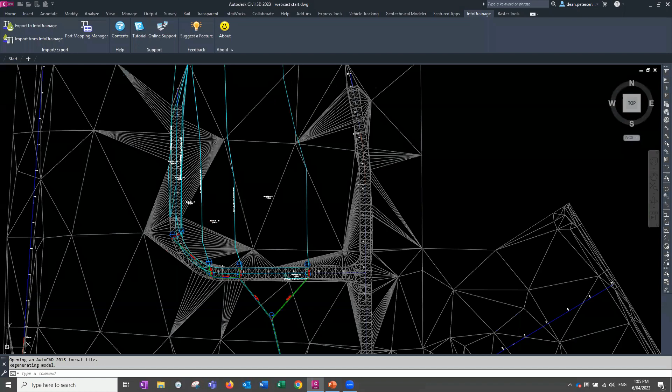So I'm going to open up Civil 3D here to begin with. Now, for anybody that has seen any of my webcasts up on YouTube before, and that's where this will end up eventually, you may recognize this little model, and if you've done training with me, you'll probably recognize it as well. Just a little Civil 3D model of a pipe network.

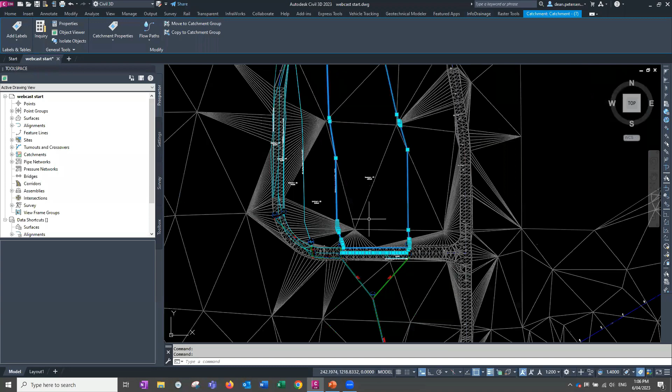The one thing that might be a bit different if you haven't used them before are these catchment areas. These are in Civil 3D already. Make sure you are using the catchment areas that are the new type. Under the Analyze tab up here in the ribbon, there are these ones, which is Create Catchment from Surface. Not the old type, which was to pick a surface and use this catchment area out of the ribbon. Don't use those. These are much better. They recognize when there's another catchment area next door and they don't overlap.

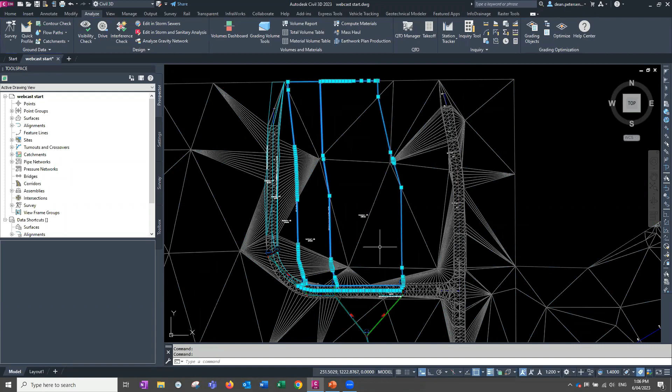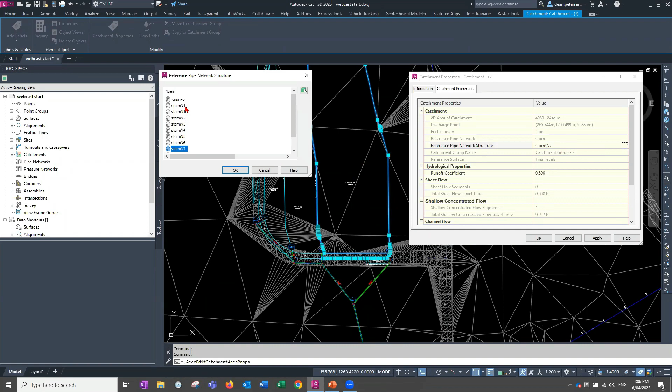Also, if I have a look at the catchment properties of one of these, when you create them, you've got the ability to give them a reference pipe network structure. So all the water from this catchment is going to go into what structure? It's going to go into storm N7, and we can nominate or pick a pit for them to go into, or a sump, and that's the N7 there.

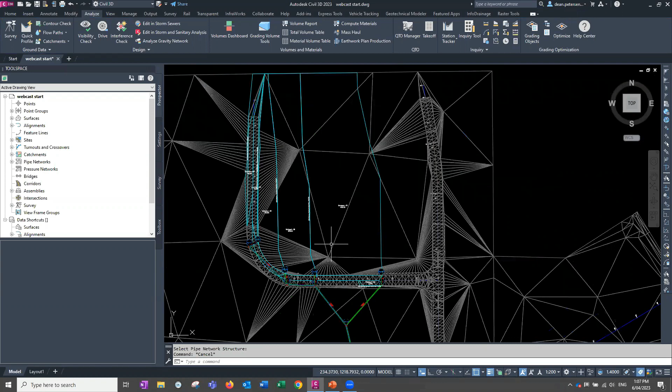Yep, that's it. And so that information will transfer across, as you'll see. So use the new ones out of the Analyze tab in the ribbon. Okay, let's have a look at the export function. So

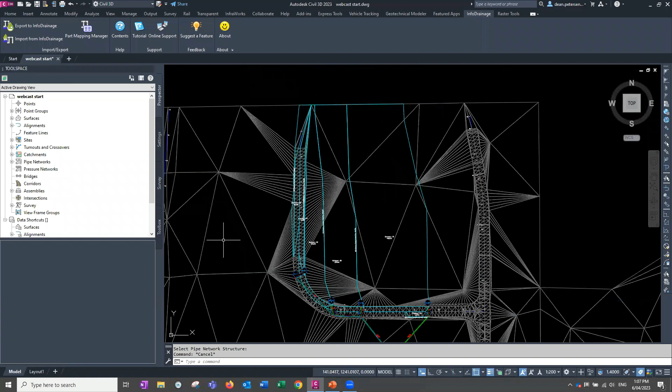MicroDrainage or InfoDrainage. I said micro because, as I understand it anyway, this is the next iteration, if you like, of what was called MicroDrainage, now these Innovyze products. So when you load InfoDrainage onto your machine, it will put a ribbon into Civil 3D for you, which is the one we're seeing right now.

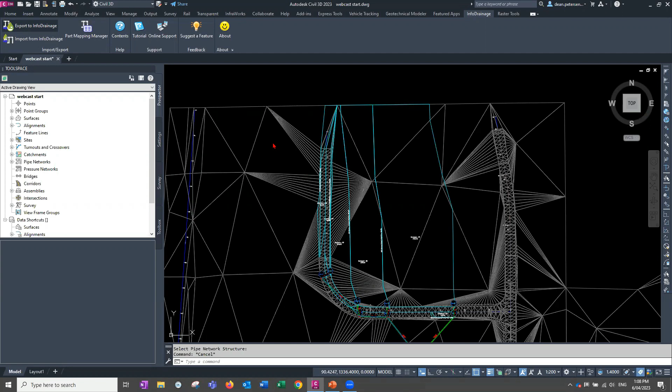And we've got this button here, export to InfoDrainage. So I'm going to click on that. It might take a moment to come up. It's got to go and find its license and things like that, I believe. Here it comes. And we want to tell it where we're going to write this out to. So I'm going to go to my desktop, put it there, just call it web for the web training. Going to go next.

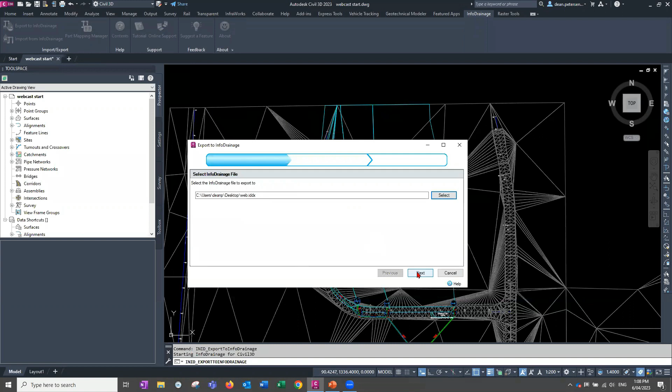It'll look at all the networks in your drawing. This is the one I want to export. And I'd also like to export my surface. The surface in here is called final levels. So I'm going to export my final levels surface out to InfoDrainage as well. Go next.

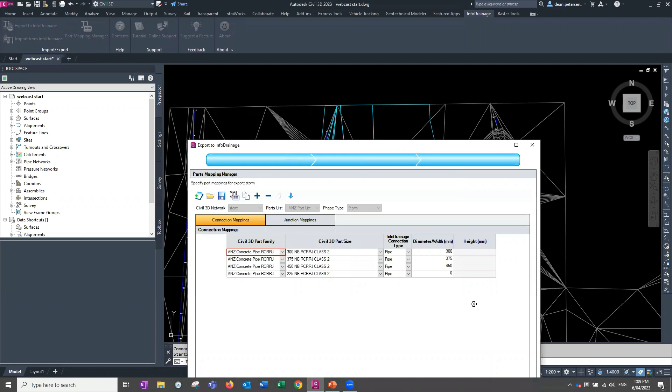Okay, once you get that nominated, it then goes through and asks you what these pipes that it's found in your network want to correlate to once they get over into InfoDrainage. So these pipe sizes here, if it's found my 300 pipes, it's going to make them 300 millimeter internal diameter when it gets through to InfoDrainage, Innovyze, and you can change those if they're not matching up properly.

Now my 225 pipe there hasn't put the right diameter there. Also 225 is what it's going to be to make a 225 pipe in Innovyze. Okay, so that's the pipe mapping.

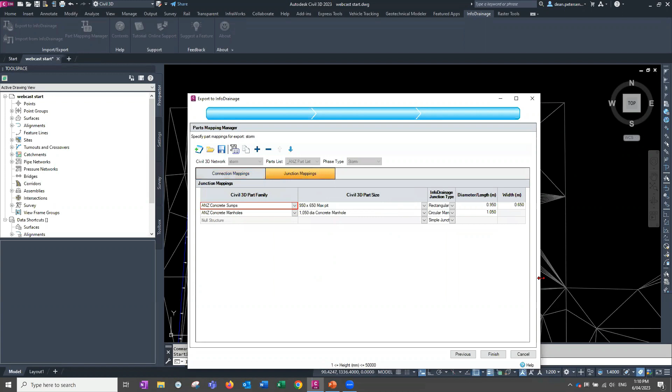We'll look at the junction mapping now that goes across, and I actually like the fact that it's asking you what you want to do, and you can change it manually rather than trying to do it automatically in the background, which some of you might have seen for things like SSA if you've tried those before. I actually think this is quite good. So we'll see that when we come back again as well.

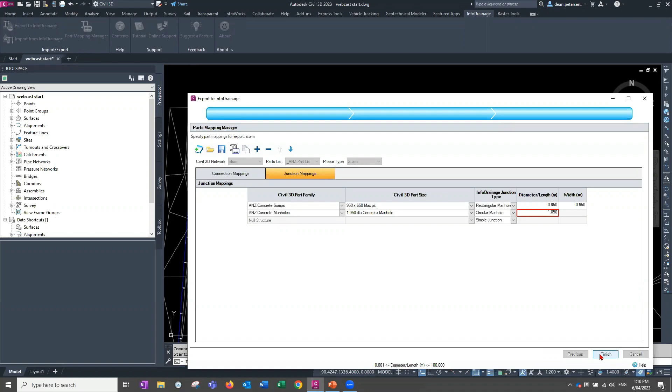All right, so yep, my 950 by 650 max pit's going to be 950 by 650, and the manhole's going to be 1050 diameter when they go across. So that's all good. Go finish. And it will export those, and she's all done. All right, I'm going to leave this open. Just make it a bit smaller.

And I'm going to open up the IDDX file, I believe is the right one, to go and open it. And again, it's going to take a moment to get its license and things. I've clicked it properly. There it goes.

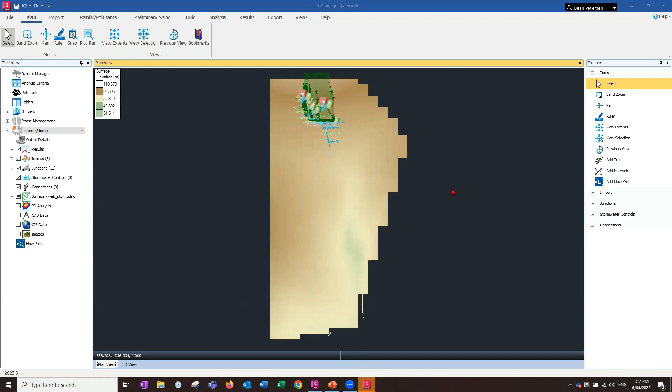So I believe this product was actually made in the UK, moving on from MicroDrainage. So it's not really American based like Civil 3D is. So that's quite nice. Okay, so here we go. So this is InfoDrainage, the one that works with Civil 3D. The other ones don't do a direct conversion across from Civil 3D like we've just seen. They may in the future, but at the moment they're not.

So we've got a surface here. It's displayed differently from what we see in Civil 3D, but if you don't like to see it, you can turn it on and off. Where is it? Here it is. So we've just got the tree view down the side here, which you might be used to from many other programs, and you can just choose to turn things on and off. I probably don't want those contours, get rid of those.

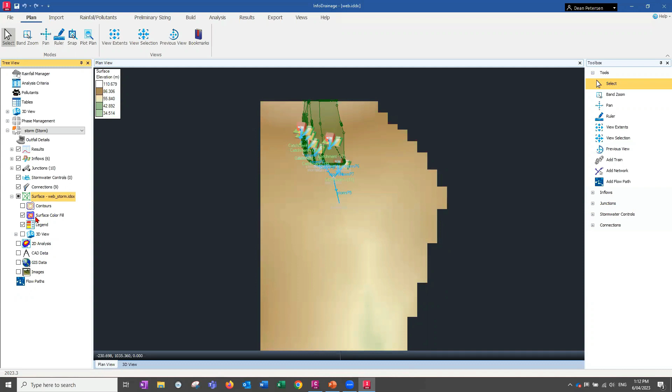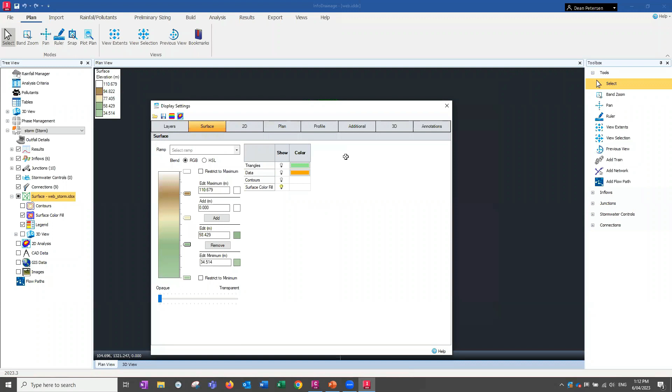And if I want to, I can actually go into the display settings for that surface and change the way the coloration's done. So I'm going to move that up, move that up, move that up, and it's just giving me a better color graduation there if that's what I want to do. That's nice and easy. What I can also do is, oops, where'd that go? Close that.

Change the display settings for the size of these icons. So display settings, in plan, text height, I'm going to bump that down to about 5, I think. And the icon height to about 10, something like that.

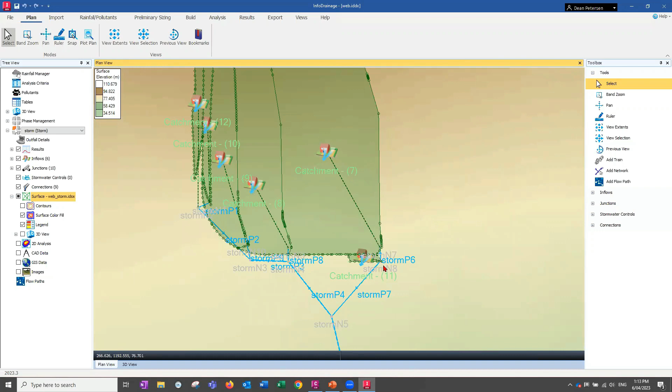Just to make things a little bit easier to see what I'm doing in a model this size. So you can see my catchments have come through. They are linked to those structures that was done in Civil 3D, so that's nice. All the pipes are here. I can click on one of those, and all the pipe sizes and things and their levels will come through as you'd expect them to.

The catchments themselves, double click on those, and you can go through and change all your catchment properties. The dynamic sizing, there is a pipe sizing function up here in the ribbon somewhere. Preliminary sizing. I believe that's the top one here, preliminary sizing. Yep, that makes sense. Which is a quick analysis and just a quick pipe sizing for you. If you haven't done it already. Most of the time you're going to know what pipes you just want to check, in which case the full analysis is this bottom one.

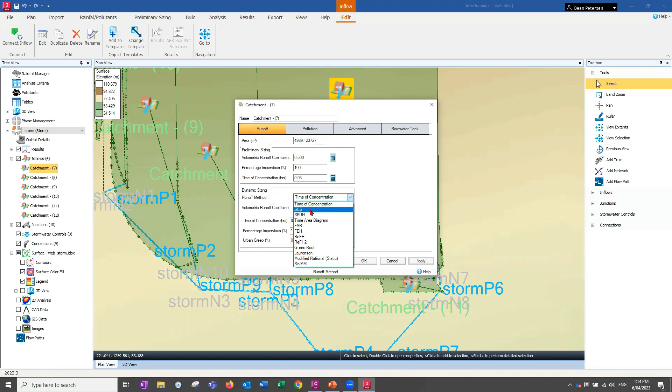The runoff method is a simple time of concentration here at the moment, but you've got many other options. Modified rational, SWMM, what's the other ones I've seen used? SCS I've seen people use here. And each one of those will give you different parameters that you fill out for your particular catchment area. I'm just going to leave that on time of concentration here at the moment. I'm not going to change any of those limits for time, but of course you can.

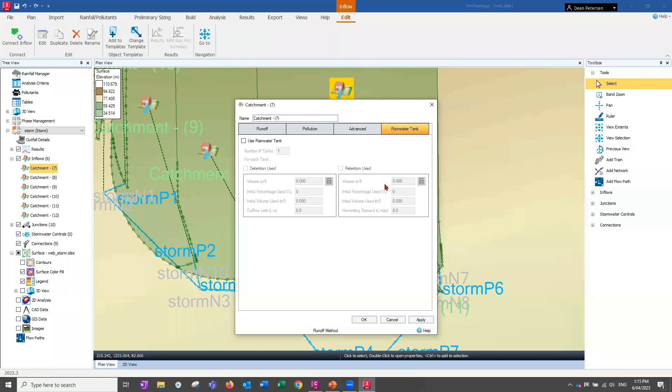And then you've actually got pollution buildup that can be monitored as well. Put in path lengths and things, and it looks like each one can have a storage tank as well on them. So I'm okay with that. I'll cancel that out of there. Speaking of that, there are other objects. So for instance, if I zoom in down here,

we can, under build here, add other stormwater controls, such as a bioretention pond, all sorts of other ones, actual ponds, infiltration trench, a swale, and all of these have the ability for water to be lost out of the system by infiltration. And the cellular storage, underground storage, tanks and pipes as well. So if I just show you one of these quickly, you just sketch the size you want it to be represented as.

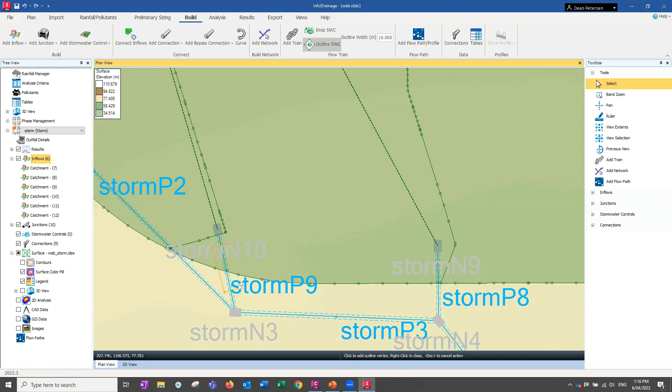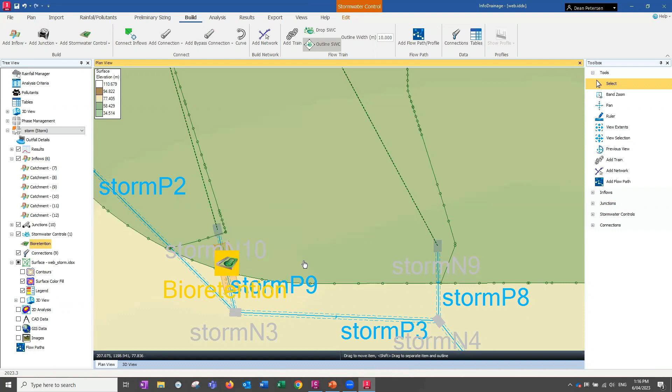Oops, sorry. And that's just what it's going to show up on the plan view. There we go. And it's a little bioretention pond, and it's got all its own properties and things that you can define. It's picked up those dimensions, but you can obviously override those with filtration layers. There's actually an image down the bottom here that shows you what all these things are that you're typing in, which is actually quite useful.

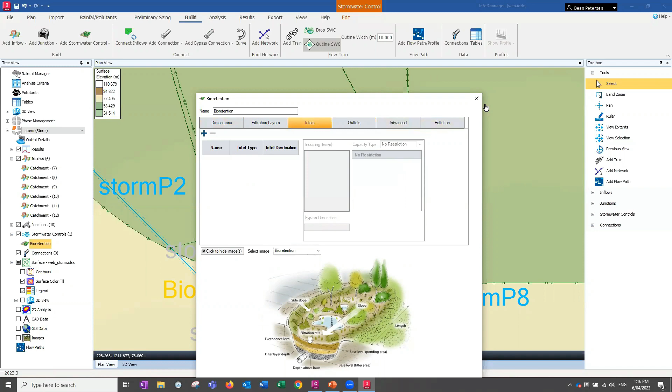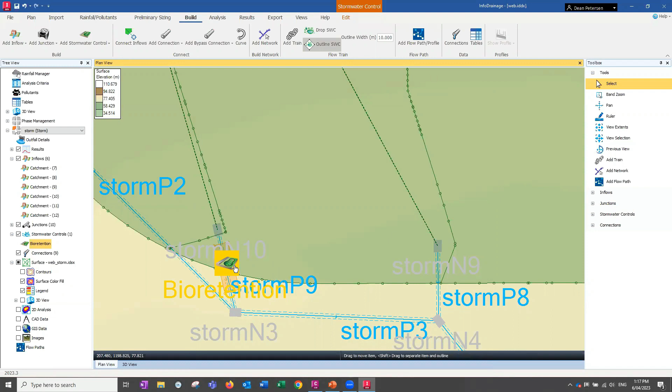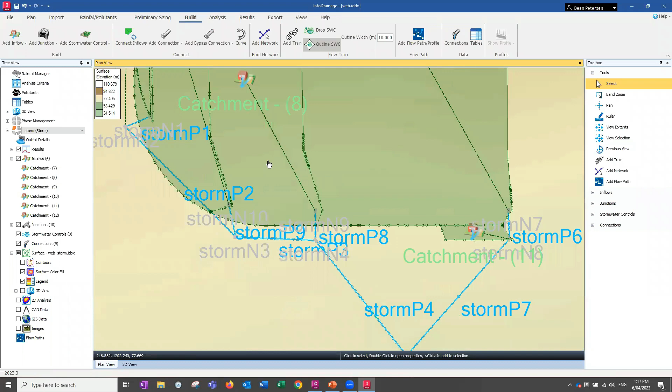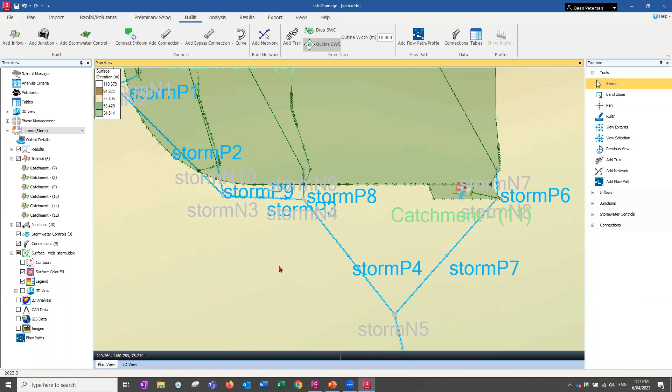Inlets, outlets, and you can simply take your pipes and connect them through that bioretention structure, and that will be analyzed at the same time as all your pipes. Not going to do that. I'm going to keep it the same as Civil 3D for now, but all of that functionality is in here, which is good. That's what we're going to be doing or needing very soon, if you're not doing it already. So that's a big part of what these programs do, is have that extra functionality. Okay.

We need to go and have a look now at the rainfall manager here. So the input of the storms that you can apply. So I've got the rainfall manager. For those in Australia, you'll be pleased to know the AR&R, Australian Rainfall and Runoff, I believe it means, is already in here. For New Zealanders, unfortunately, we're going to have to use a user-defined rainfall to get our data, or there is IDF curves down here if you want to define those. However, let me show you this AR&R, because I think most people on this call are actually from Australia.

If I add one of those, it gives you the wee map, and you can go and get the data for any part of Australia that you want. And so I'm going to go down to Melbourne down here and say my project is there, shall we say, out by the airport.

And you can click the download button at the bottom and it'll go get all the data that you want. Now, just to save time, I've done that already and downloaded it. It's just a few files that it needs to go and grab for that particular part of Australia, which is nice. So I'm actually just going to load them up down here manually. And if you have your own files already, you can just load them up the same way.

So it's the hub data text file, the BOM design rainfall, and the BOM coefficients is there. Okay, I did actually get those ones just from this map from the public data. So that being done, we need to probably have a look at the other tabs up the top here. Well, we do actually.

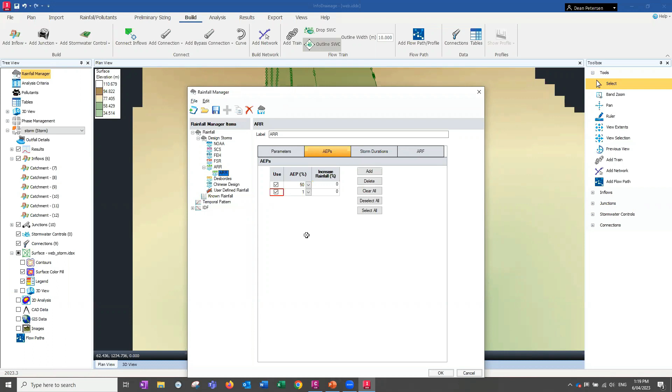So what's the expected rainfall frequency? So that's our AEPs. I'll put another line in there by clicking on the add. So for this analysis, we'll just do a few. Let's look at the 2-year return period, which is the 50% chance of occurring, and the 100-year, 1% chance of occurring. We'll do both of those. Obviously, you can do as many as you want. It'll just take longer to calculate.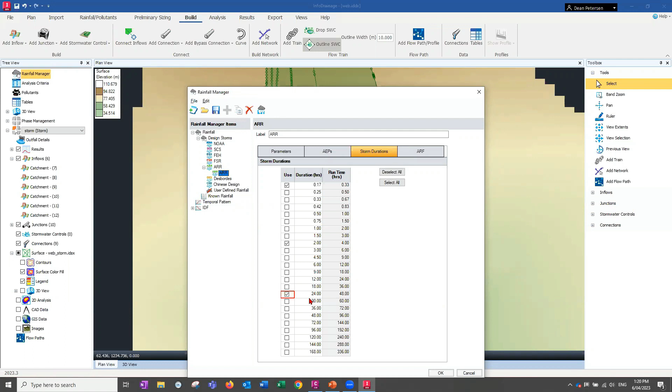Storm durations that we want, you can select as many as you want. For this one, let's do a quick cloud burst, 0.17 of an hour. Let's do a 2-hour storm. Let's do a 24-hour as well. I guess maybe a 3-hour as well. What the hell? That'll do for now, but obviously you choose the ones you want.

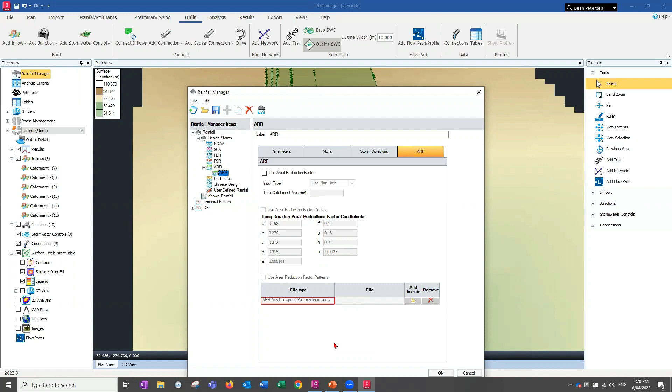Then there is an areal reduction factor as well. I haven't actually got a file for one of those, so we'll just leave that off for the moment, but that's all there. All right, so that's nice for you guys in Australia. So I'm going to go okay, and have a look at the analysis criteria now.

Once we're in here, we're going to do the full dynamic analysis rather than the quick static. We'll tick on those rainfall events that we wanted. So it's actually going to calculate 80 different storms. And here's the output interval for the results. Every 5 minutes, it'll do a result. So I'm happy with that.

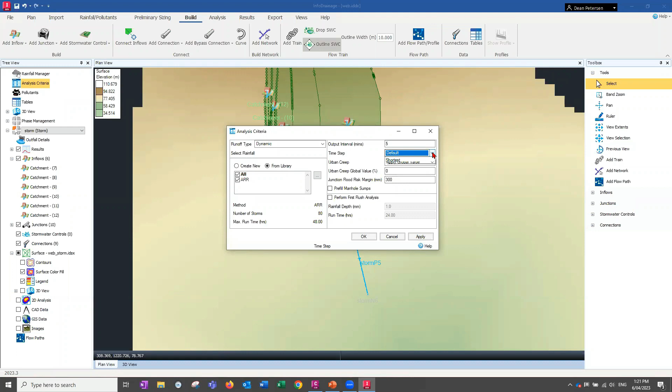Time step, you've got a couple of options for time step for the analysis. Now, I believe it's the SWMM method of analysis the whole program is based on. But the default seems to work pretty well. It seems to be very, very stable. So that's quite nice. Urban creep. So that's if you're expecting the amount of impervious areas to increase over time. I believe that's what that's for, which is this figure here.

And the junction flood risk, I believe that's 300 millimeters below the lid of a pit. It will assume that means you need to be worried about overtopping at that point, and it will flag it. And it can do a first flush analysis, but I'm not going to do that. That's all I need. So we'll go okay.

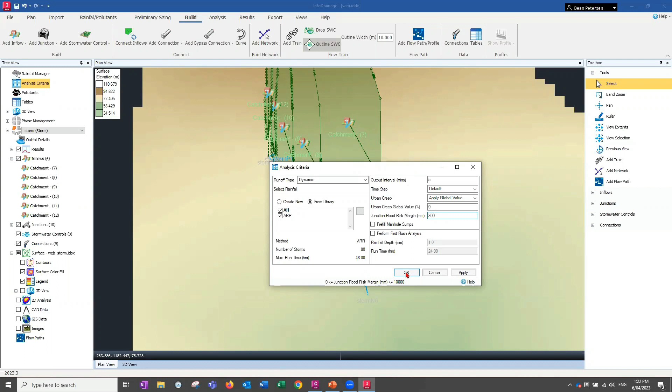Now you guys, as I say, being the AR&R method, you'll have a better idea of what you're actually wanting to input, because as I say, I'm no hydrologist and I haven't actually ever used the AR&R method, but hopefully what I've shown you there makes sense. I've been making that one up as best as I can. I think that's how you'd use it. I assume that's right. Let me know if it's not.

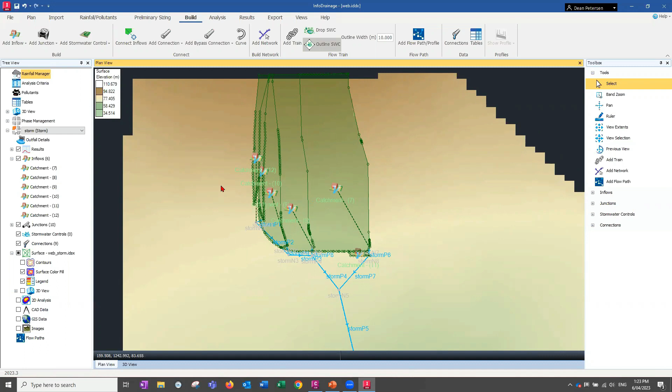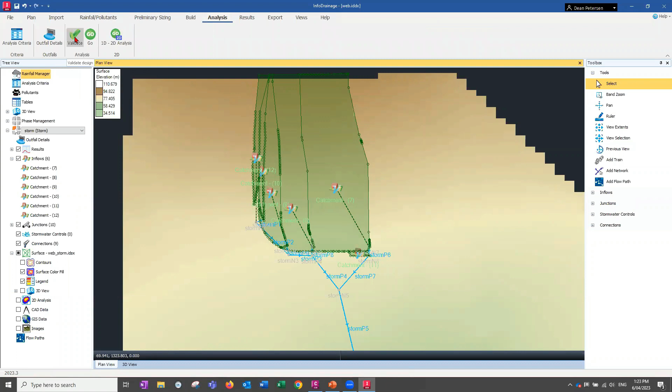The thing we want to do now is probably check that everything I've set up is good for analysis. So let's go to the analysis tab up in the ribbon. There's a validate here, little tick mark, click on that. It'll have a look at the model, and we do have some issues.

Okay, so these first ones here, it says match invert elevation to the lowest connection invert elevation. So it's slightly mismatched between the data that's read from Civil 3D, the bottom of the structures, and the lowest pipe. And it's only a few millimeters, like 4 millimeters, 3 millimeters different. So I'm happy with all those. I'm going to tick those on, and the software will fix those up so it can run the analysis.

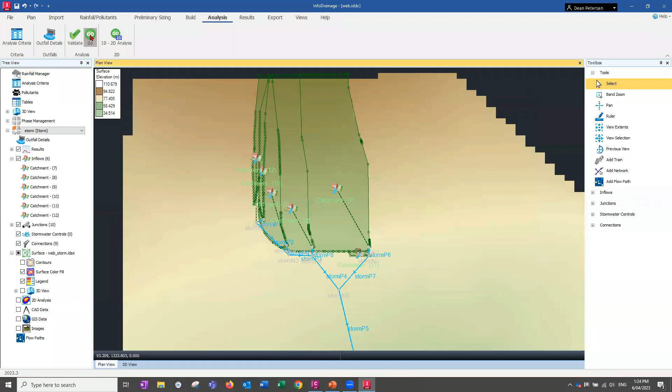This one here, match connection elevation to the upstream invert elevation. Again, a couple of millimeters. That's not going to make any difference to my model. It's below survey accuracy anyway. So we'll fix all those. We'll go okay. And we'll go validate again, and it's all good, ready to go. So I'm happy. I can run my analysis. I'm going to click on the go. And it shouldn't take too long.

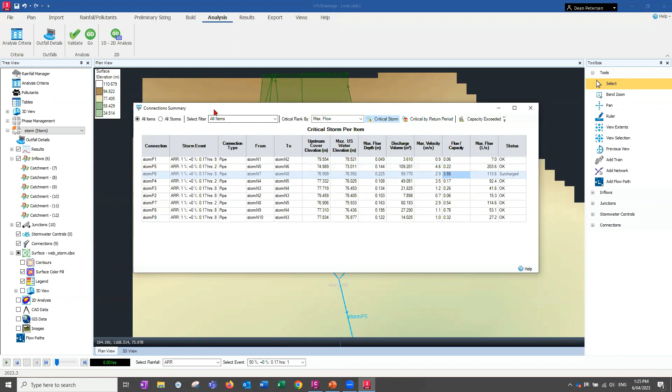And here's one that's surcharged. Okay, these are the things you're looking for. And the flow over its capacity is 3.5. So it's well flooded or surcharged. So we probably need to see where that is. It's Storm P6. Now, so far, I don't think I've actually found it, or capacity exceeded here. Yeah, there we go. And it highlights it in red when you click that button.

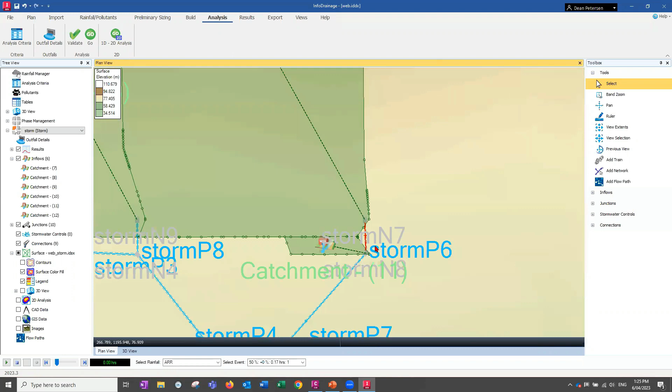I don't think I've actually seen if you can double click on this and actually zoom. I'm pretty sure you can't zoom to that pipe, but it does highlight it as red in the plan view. So here it is. I can go and have a look at that, but I can also get a long section through this, which is quite nice.

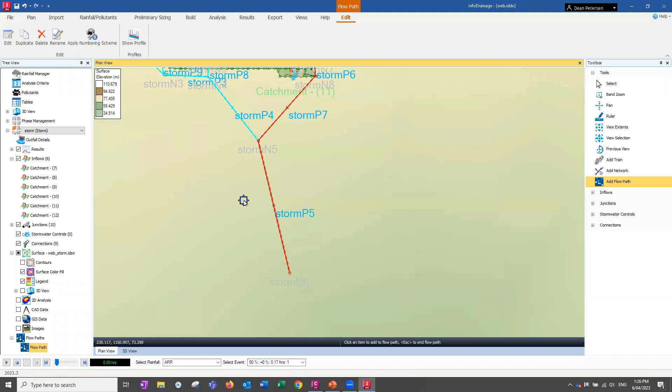So if I go and add a flow path from there to there, this had a wing wall on the bottom of it in Civil 3D. It's actually converted that to an outlet already. It just figured out that was the lowest pipe, it must be an outlet. So let's do that as a flow path. I can rename that if I want to, but I can also get a profile from it.

So there's my profile. These are customizable in the display settings here to change how they look, but they're actually not bad. There's a couple of buttons up the top here. There's the minimum cover depth line. You can set that depth somewhere, I think it's in those settings, but I'm going to turn that off just to make it easier to see. Sorry, that's the HGL. There's the minimum cover. That one there can go off. I want the HGL on. And if we zoom in on this, we can have a look at that Storm P6, the problem pipe.

And there's a play button down the bottom, we can actually get a graphic. It goes really fast actually for a storm this quick. So you can actually just use the scroll to come through, and there you can see that is full at that point and going back down again. Now, the critical storm, I think it was number 7 was the one for that pipe. So it is backing up in there in the pit, but it's not actually overtopping.

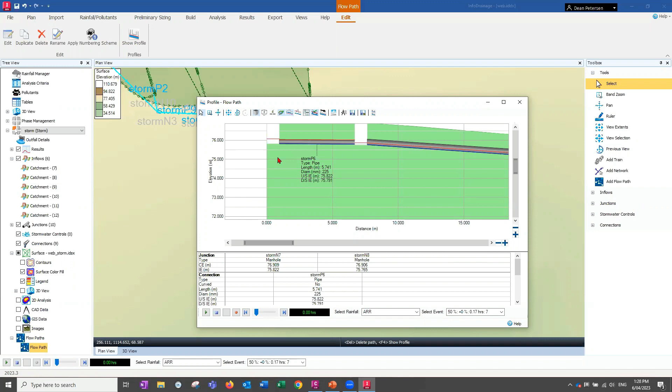So that's okay. But the pipe is surcharged. It'll be getting close, I guess, to starting to overtop. So we probably want to do something about it. We want to bump it up in size, I would think. So I'm going to come into here, and we want to show this round trip anyway. Pick on that, double click on it, and instead of a 225, let's make it something that's got plenty of capacity. Let's make it a 375. So we'll see that change happen.

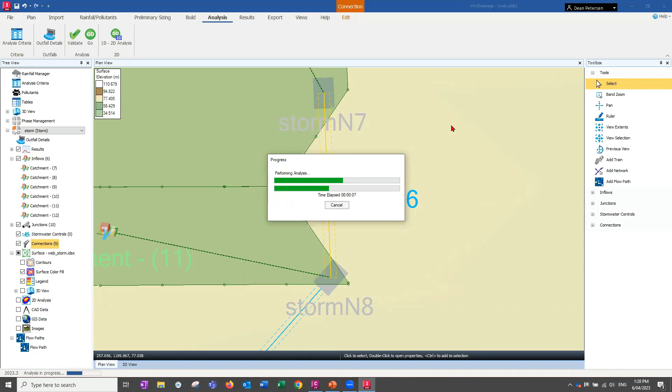Make it a 375, go okay, rerun my analysis, and it should be all good. Being a 375 is massively huge. Go. Okay, and again, look at the critical storm. Actually 0.92, so it's still getting up there, but it's not surcharged anymore. So that's good. I did go big enough, and yes, Storm 7 was the critical one, as shown over here. All those are different storm events; for each pipe it'll be a different storm that's the critical one.

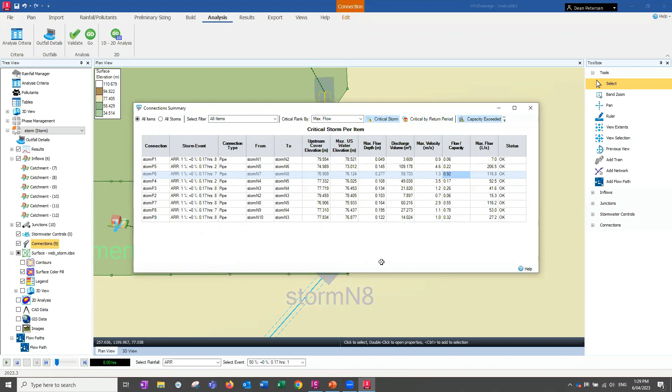So that being said, let's go and take this back to Civil 3D. So I'm going to save, and we'll see that change come back in theory, hopefully, if I keep my fingers crossed, because that actually had a problem. Now if I go to the file, no, not the file tab, plan, no. Here we go, about. This version that I'm using of InfoDrainage is 2023.3. 2023.2 and previous, when you take it back to Civil 3D, was crashing, at least mine anyway.

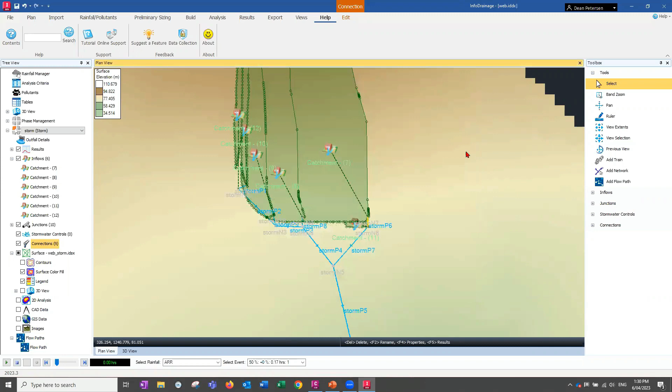This version is the one you want, because the ANZ parts list seemed to be the problem. They fixed it for the UK and Ireland parts list to work. They were getting a similar crashing issue, and it's fixed ours as well. So if you're using this, or if you're going to, make sure you're at least using 2023.3 version or later. Okay, let's just save, we've done that. Let's go back to Civil.

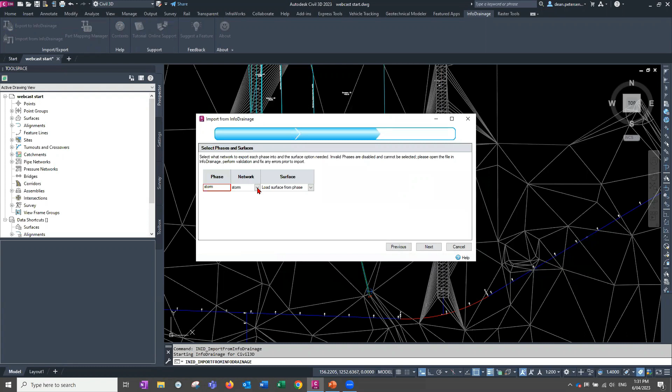And let's bring it back. So from the InfoDrainage tab in the ribbon, import from InfoDrainage. The file to import will be the one on my desktop that we've just been playing with. Go next. The phase we're analyzing is called storm. The network we want to bring in is called storm in Civil 3D as well. That's what I called it.

And for the surface, we're going to tell it not to change the surface. We're going to just keep this one in our drawing, so use the existing Civil 3D surface. It'll then find all the pipes in the InfoDrainage, and it asks what do you want to convert them to when they come back. So they're all going to be RCRRJs for me.

And we've got a 300. And this is where you get to choose the one you want. It doesn't try and do it automatically, which means it doesn't stuff it up. So I quite like this system. It doesn't take long to do. 300 on the board, 450. So it doesn't grab the wrong one, the one you didn't expect it to, which has been a problem with other exports to analysis before.

450 and a 375 class 3. And class 3 because it's under the road. So 375, 450 and 300. Cool. And also the junctions. So that rectangular one was the sumps or pits, and it's a 950 by 650 pit. And the manholes, circular manhole, is our 1050 diameter concrete manhole.

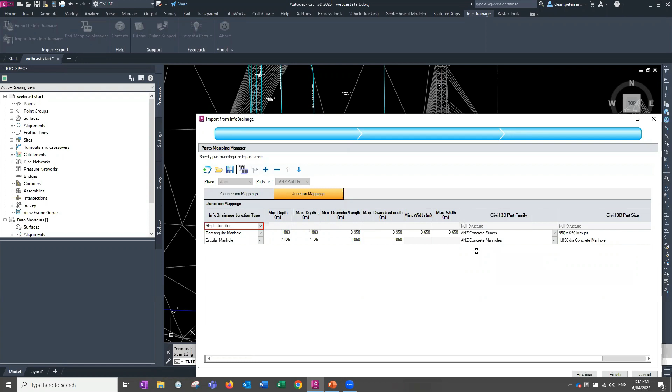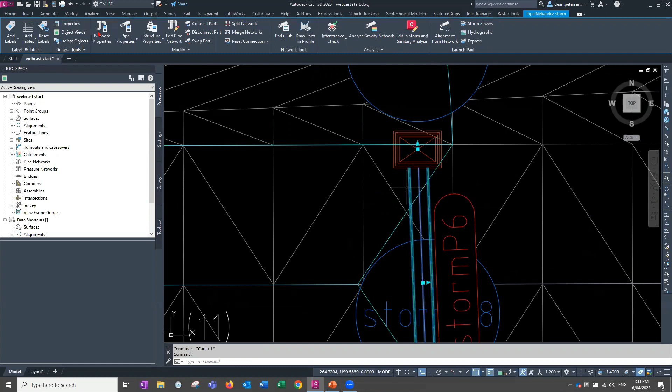All right, down the bottom, I'm going to go finish. It's going to import those. And once it's finished, there is our, used to be a 225. Now it's a 375. You can see the size is 0.381 there, but if I go and have a look at its properties, we will see that it is 375 class 3, exactly what I told it to be.

All right, the only thing I can see bringing it back, if you have some that are RCRRJ, other ones that might be a 375, PVC pipe or something like that, maybe. You'd need to identify those somehow so that they're slightly different. So I'd actually make one a 375 in InfoDrainage, and the other one maybe a 376 or a 374, and just note that if it says a 374 diameter, that's what I was using for my plastic pipes, and then you'd have those in the list to make as separate pipes when they come back. So it would probably be able to get around mixed networks that way.

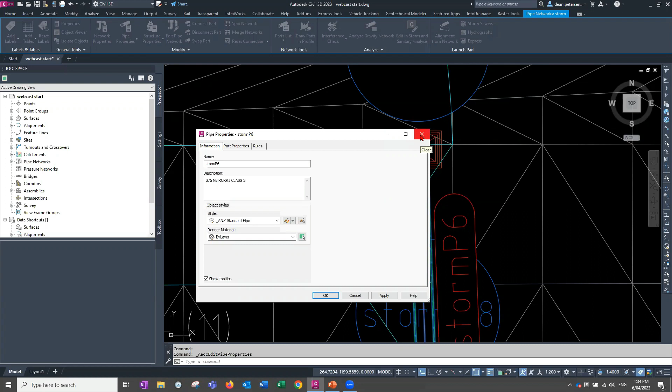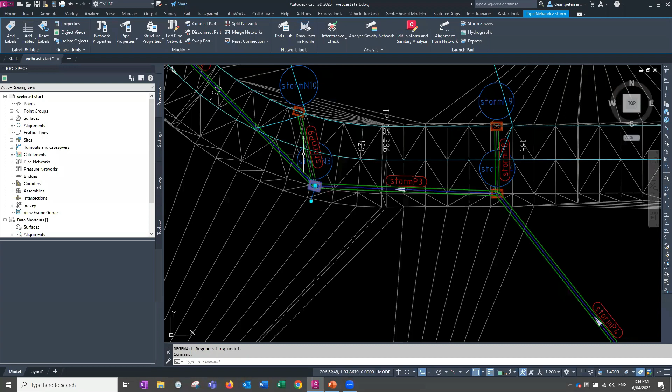Okay, so that's come through, and we should be all good. And if you have a close look at this, it hasn't actually affected anything else that it shouldn't have. All the pits here are the same orientation that they were before. And the manhole as well, you can see it's skewed off to the side. The only thing that it has done is we don't have the wing wall on the end anymore, in which case you just need to go and find over in the side here, it's actually got a null structure there. Just select the null structure and convert it back to a wing wall.

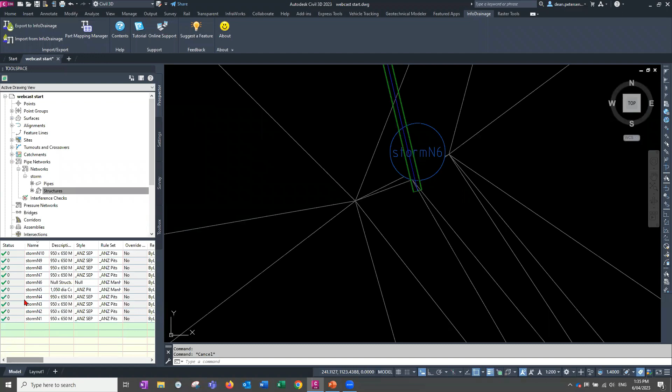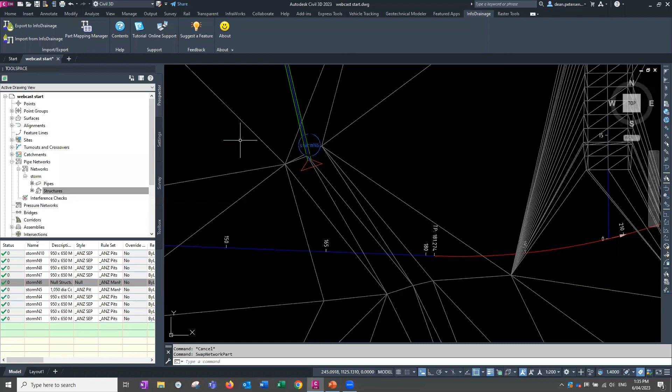Actually, we'll do it just quick as we've got a little bit of time. You'll find that the orientation is still all there as it was previously. So the null structure is there. Go and select it. Right click. Swap part back to the wing wall that it was. So that's the only thing I've seen that gets changed so far anyway. Put one of those on it. Okay, and there it is. And it's at the right orientation that it was before it left. So that being said, that is InfoDrainage.

Now what I want to look at next is the next step. So this is relatively easy. This, as far as I can tell, is a cut down version of the full ICM. So let's go and have a look at what the full ICM is. This is what I would get into big trouble with, not being a proper hydrologist. As you may well know, hydrology is something of a black art. We need the practitioners of that black art to be the ones that use this. It's massive. It's absolutely huge, what it can do. We're going to have a look at, in particular, 1D and 2D flood analysis. So there is, I believe, back in InfoDrainage, the ability to do a 2D flood analysis, but we've got it even more capable in here.

So if we actually bring up one of these. Here is a model that somebody spent a lot of time building. So that's why I haven't gone and done this myself. Somebody's gone crazy bananas on this one. But it gives a good idea of what you can do if you know what you're doing.

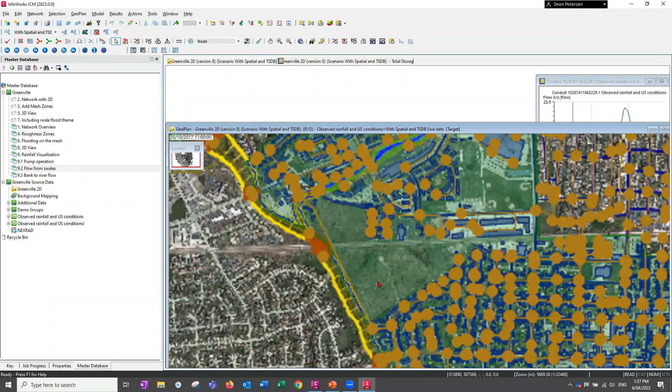We have a big 1D analysis, which is all our pipes and our structures. We also have in here, if I can pick it, the 2D zone. That area has a surface on it. Now, you might have seen these 2D analyses were talked about before. What they are, or why it's called 2D, always confused me.

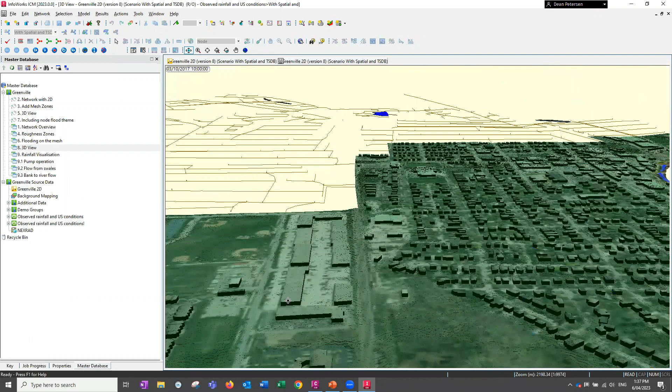So if we go and have a look at one of these, 3D view, and bang it into 3D, so we've got a 3D view here, and you can go under the ground and see all the structures underground if you want. Somebody spent the time to actually lift up those as buildings and put impervious roofs on those and discharge that into the pipe system. Everything else is done as runoff, but the runoff, if I can just zoom in carefully.

Okay, here we go. Here is why it's called a 2D analysis. We've got the triangulation that came from the surface, but they aren't sloped triangles. They are flat. So they are two-dimensional faces. But that's how it works out the flow from one to the next lowest one next to it, to find all the ones around it and find the lowest one next to that. And that's how it routes the flow. So that's why it's called a 2D analysis, I believe, as far as I can tell. That's my understanding.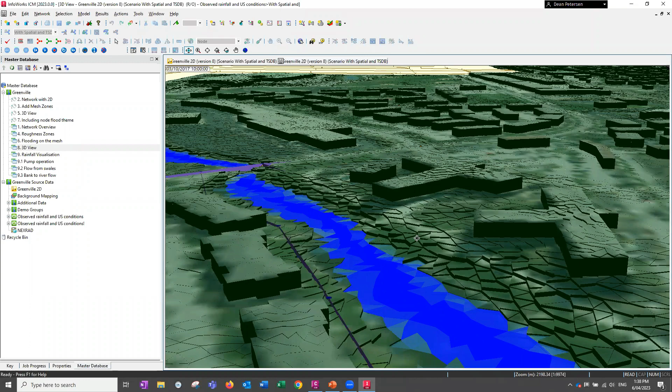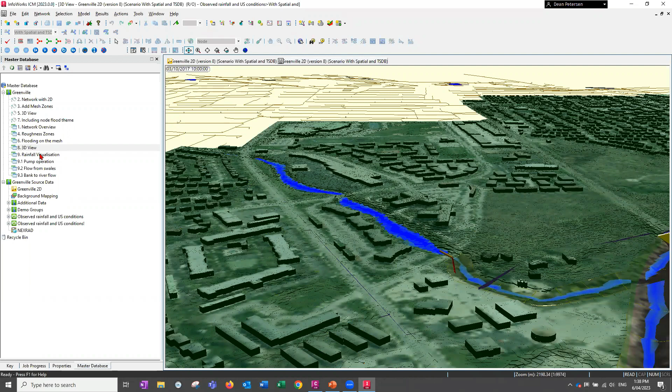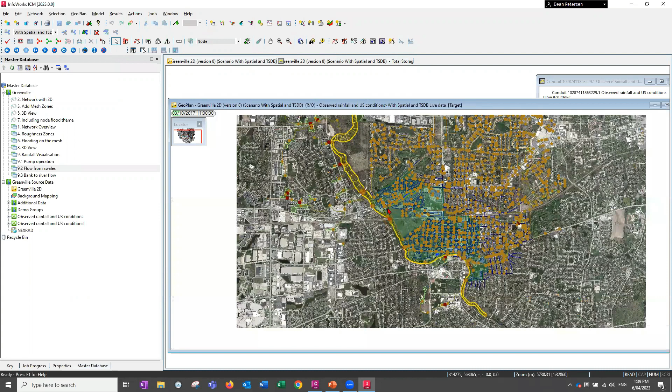But let's have a look what you can do with this. I'll bring this one back up again. Flow from swales. This particular model has been set up with a rainfall event to try and figure out what happened in this particular town, and I'm not sure quite where this town is. It's a data set I got from Autodesk, but it might be in the UK. What happened with a particular storm that caused a lot of flooding. So they've modeled everything, or they had everything modeled perhaps already, and they can run the same storm event across it.

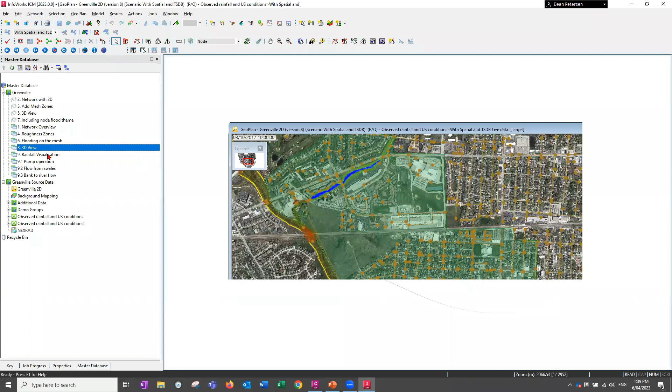In fact, if we go and have a look at it, no, not 3D view, rainfall visual. They've actually programmed in, here we go, the rainfall event. There's a play button up the top here. So from, I believe, the rain radar on that particular day, they have got the intensities that occurred. So there was a storm that came across the catchment to begin with, a little one. Then shortly thereafter, a huge one came in from the north.

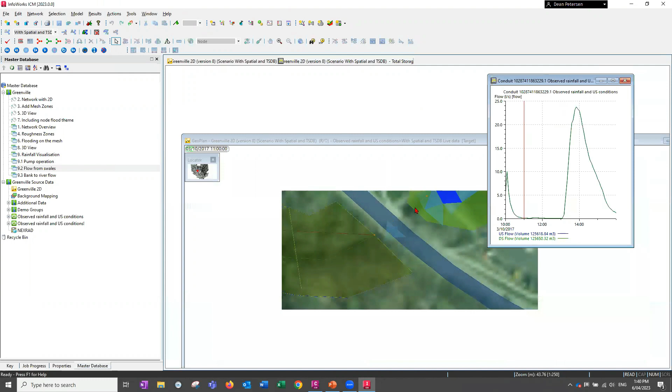Massive amount of rainfall, and that caused a lot of flooding. So they've taken the rain radar records, and eventually that'll disappear off to the east, I think. There she goes, calming down now and gone. So they're actually playing a real rainfall event through the system. From that, we can get the results. I'm going to go for the swales one. And again, we can play the results. So this particular graph here is for a little pipe coming out of these swales, underneath the road I think. That's what this graph is for.

So if I go back to the beginning and we'll zoom out a bit. Now, what they've also modeled is the reach of all this river here and the cross section of all the river. And there is a flow in there originally. Water landing on the mesh can go into the river, and the river can put water onto the mesh if it wants to. As well as the 1D area where the pipes are up to the north, which doesn't have a surface. All the catchments are putting the inflow into that system, and that's flowing down under where the mesh is. But the mesh is where they wanted to have a look at the actual flood event.

There's a couple of swales here, as you might have seen in the 3D view, that are already depressions in the surface that came from potentially Civil 3D. And we'll see those being affected and filling up during the storm as well. But anyway, let's just run the storm. So I'm going to hit the play button, and it will take a little while to go through it. It's at 10 minutes at the moment, up in the top right-hand corner where I'm looking for the progress of that green bar. And we should shortly see some things start to happen.

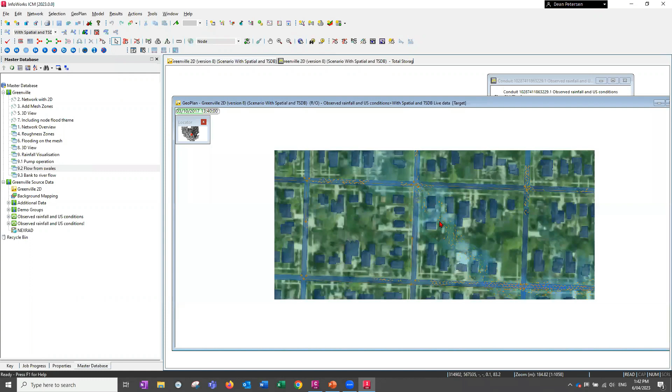There we go. So if I pause it there, what we're looking at, if I zoom in on these, is overland flow being traced. Now this is coming from rainfall falling on the surface, as well as if these pits are being overtopped, it'll be coming out of the pits and onto the surface. There's a lot of it going on down here, so they've got a real problem here. And it's ponding on the surface here. As I play it, those will stop and the ponding will go down again because it's flowing back into all the pits and manholes. So I'll just play it again, you'll see that happen.

Overland flow is slowing down now, the rainfall event is slowing down, and you can see these diminishing now right down to what's left at the end. And presumably this area may actually be a low point below those. Oh no, it looks like it still may be flowing to the south. So if we left the analysis to run longer, it may actually dissipate, or it may be a low area that just collects there all the time. There's certainly some of those up in the park here.

Okay, any of these pipes and structures you can get the information out of. That one that was up to the north, up here, this one out of the swales, that's what this flow graph is. And you can actually go through the analysis by taking this little yellow, red, I'm not colorblind, honest, slider out of here. So here is the starting conditions for up in the top here in those swales. Here is that first rainfall event, the little one that went across the city, going through to just before the big one. Big one is the peak of the big one.

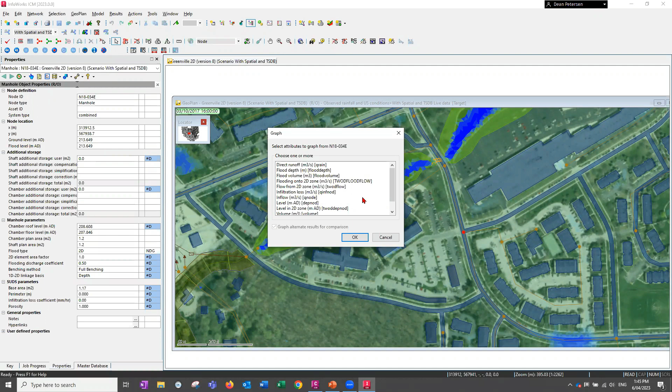If we want to analyze other things, we can. So any of these, I might close that one. Any of these structures, you can double click on it, so it's a manhole there. You should be able to get some node graph results. It's the node we're looking at. And what do you want to see? You can do flooding onto or off the 2D zone if you want to, or from the 2D zone. What do we want? We probably just want the flow through it if we can find flow. Flood volume, no, flood depth, yeah, you could do that. Inflow into there. And it'll produce the graph for that.

So that's the storm event. That's the first little bump there from the first little bit of rain that went across the city. And then we've got a much bigger one. And so the maximum inflow there, you can see is what, 0.45 of a cubic. And you can get all your Excel graphs and things out of this, as well as masses of those you can produce. But what you might be more interested in is getting some more interesting results from this overland flow maybe. So we can actually just generate a line here, a results line. So I'm going to draw a line that simply goes across the road.

And draw. No, it hasn't. Oh, yes, it has. Nope, sorry. I'm just trying to get my right click, left click to work here. So I'll try that again. There to there. There we go. And it was double left click. This will be called, I don't know, road line. And it'll be a results, and we'll go okay. And so with that, we can pick on it now.